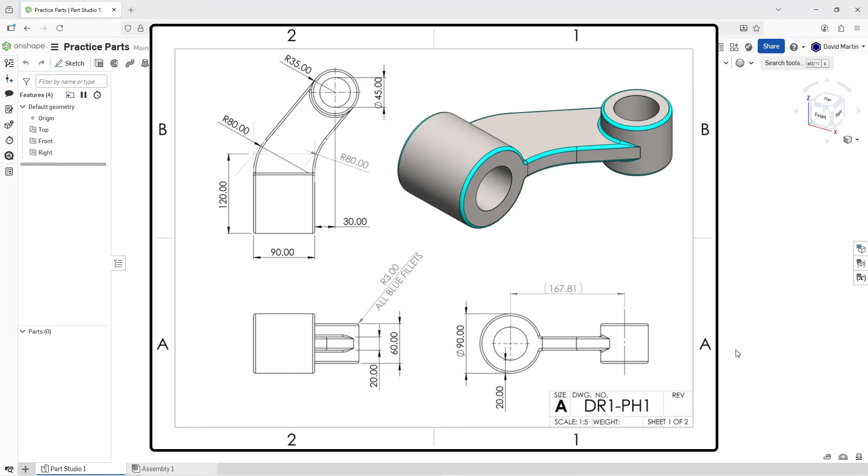In Onshape, I'm going to work on a part drawing that I found on Reddit. This is apparently for one of the SolidWorks exams or practice exams. And when you take a look at this drawing, it looks fairly straightforward. When you get into it though, it looks like, hey, maybe are there some dimensions missing? But there are some assumptions that you have to make when you are sketching and putting in the various different constraints. So let's go about doing this.

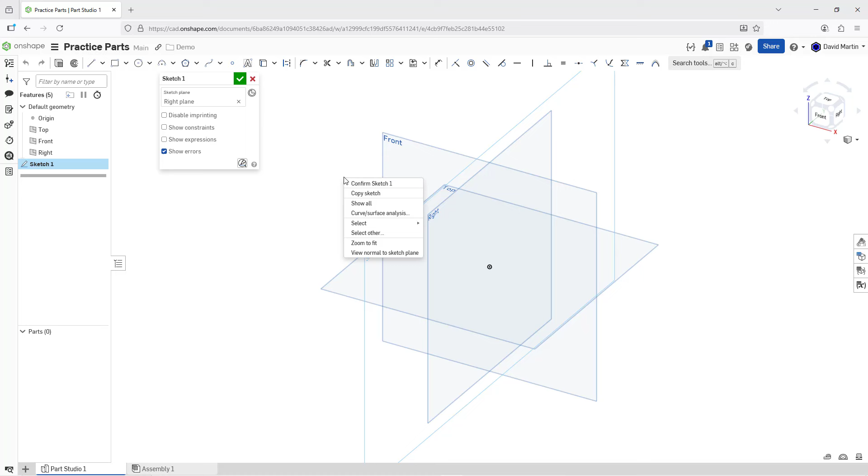I'm going to start with the big extruded cylinder down at the bottom. I'm going to select the plane called right. Then I will hold down the right mouse button to create a new sketch. And I will hold down the right mouse button again to view normal to the sketch plane. I find that to be easiest. Then let's sketch a couple of circles.

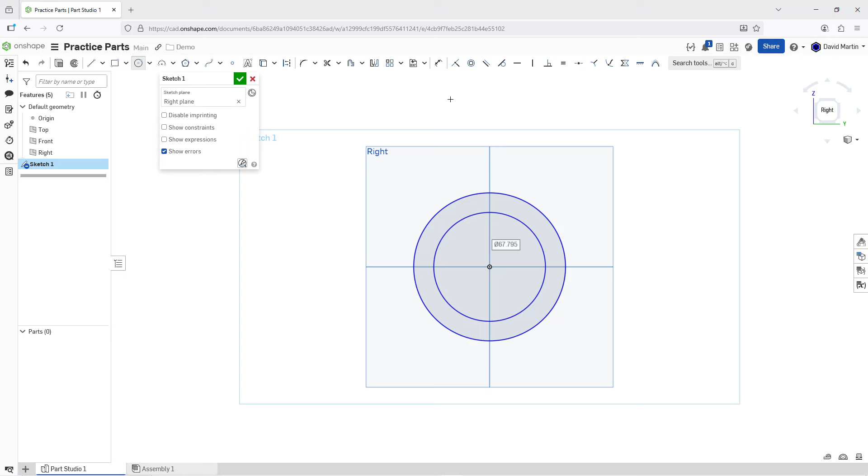So I'll lock right into the origin, and the outside is going to be a diameter of 90. So let me eyeball close to that. And then the next one is going to have a thickness of about 20. So let me drag it out about yay big. It is in blue. Let's throw in our dimensions. So let's click on the dimension icon. I will pick the big cylinder and then left click to locate it. Punch in a value of 90.

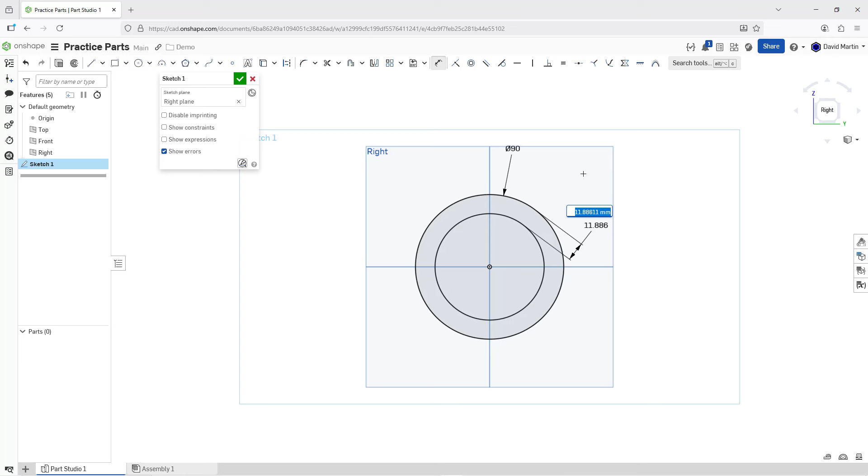And then for the thickness, I will pick the inner circle and the outer circle. And here we have that thickness dimension. And let's see, this is supposed to be a value of 20. There we go. And we can move that dimension over if we want to. This is all good. I will hit the green check mark to complete the sketch. Let me rotate the model slightly to look at it in a bit of an ISO view.

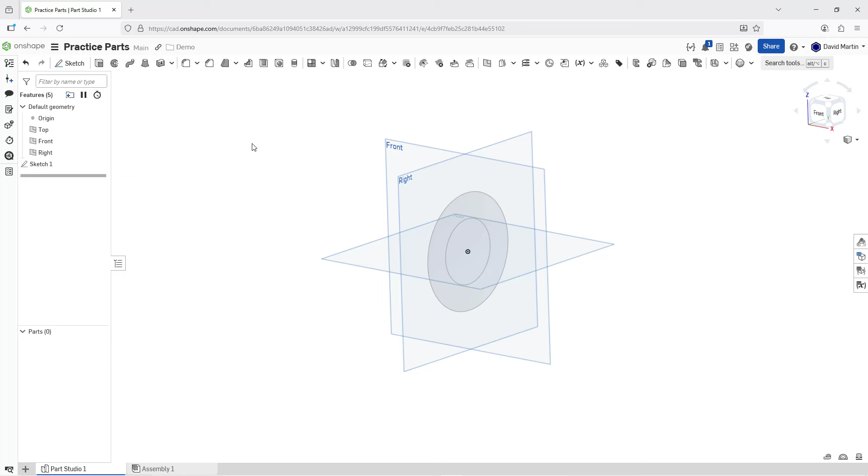Now let's extrude it. I will click on the extrude tool. Let's pick the face. I want this to be a symmetric depth, and the depth is going to be a value of 90. That is good for the first feature. I will click on the check mark.

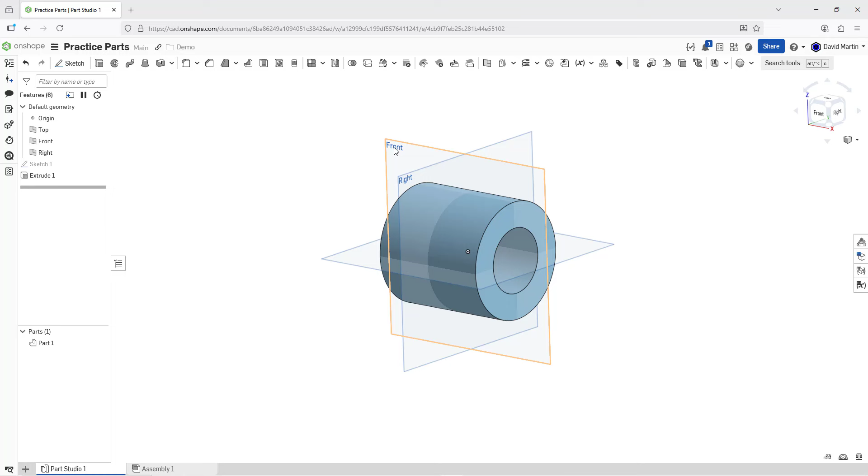Now we're going to create a sketch, and it's going to be for the rest of the part. We're going to be able to do the other extruded cylinder and also the web or flange in the middle together. You almost kind of have to do it that way, given the amount of dimensions that they give you. So let me start out by selecting the plane called front. I will right mouse click and hold and choose new sketch. And once again, I will view normal to my sketch plane.

And I'm going to start out with a construction rectangle that matches the same size as this cylinder. I come over from Creo Parametric. Normally I would just add some sketch references, but this will end up doing the same job. And I know I want this to be construction, so I will click on the construction icon. Then I will sketch my rectangle. I'm going to make it a little bigger than I need to in order to start out with. That way I can just snap into the right size by using the pierce constraint.

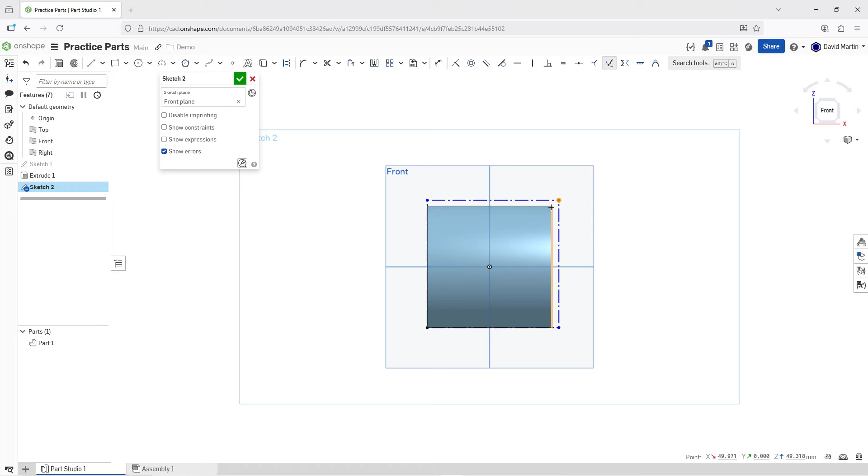That is this one, so I will click on it. And let's pick the vertex and then pick this line, and you can see it snap in there. And let's do the same thing here. And so now everything is black. We don't have any other different dimensions. So let's see. Also, for some of the stuff that I am going to need for extruding, well, I wanted to go through this thing entirely. So I need a face in the sketch that goes through here.

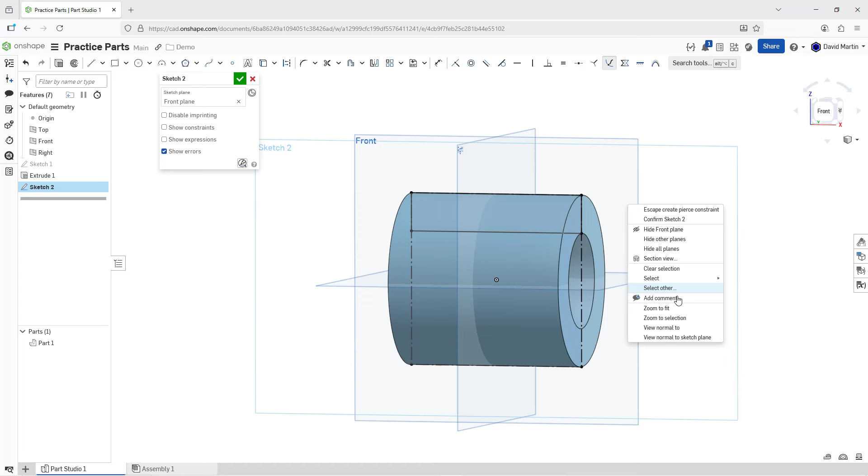So I'm going to create another rectangle. I will let it lock right into here, and let's let it lock into the width. I want it to be exactly the height of this one. So once again, I will use the pierce constraint. So I will click on it, and let's select this and select that, and it locks in. Everything is black. Everything is fully constrained. And in here we have a dimension. Well, it's not a reference dimension. It's a dimension of 120 on some construction lines. Let me go back to viewing normal to my sketch plane.

So I will create a construction rectangle, and I will start it here, and then I'll just exaggerate it a little bit to begin with. And now let's add in a coincident constraint. Let's make this coincident with this.

And we need that 120 dimension. So I will click on the dimension tool and let's dimension from here down to the bottom and change that to a value of 120. So there are our first different rectangles.

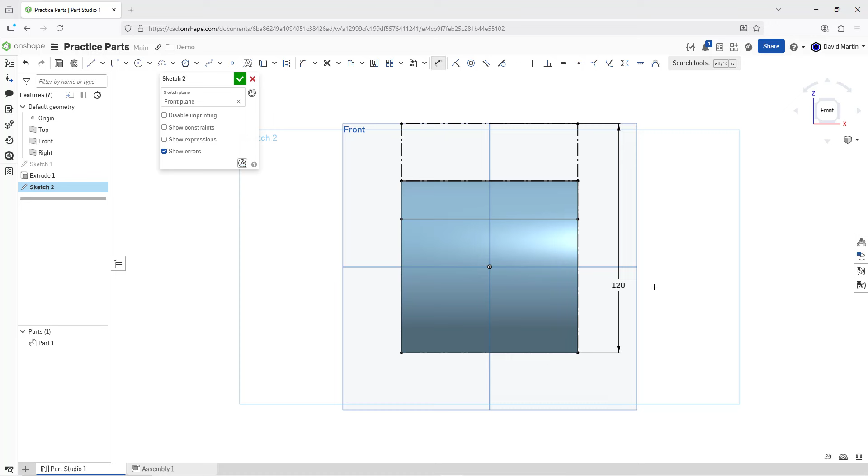And now I'm going to jump up and do the circles up at the top. And let's unclutter the screen. I'm going to use the keyboard shortcut P to turn off the plane display. That makes it a little easier to read. And so we need two circles located about up here in space. Let's do that. Let's create a center point circle.

And there's going to be a smaller circle of a diameter 45. So let me drag it out about yay big. And then let's lock right into the center and make our bigger one. In the drawing, they give a radius of 35. When we make the drawing here in Onshape, we could put in a radius dimension, but I'm going to have to use a diameter dimension when I am in sketch mode.

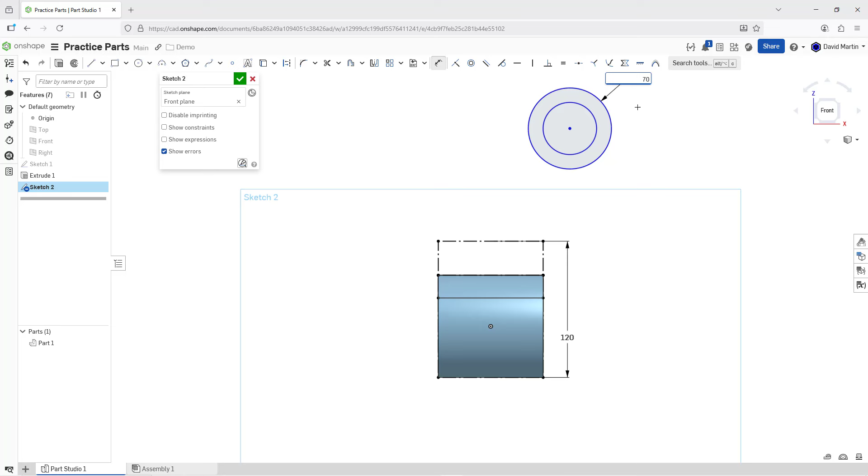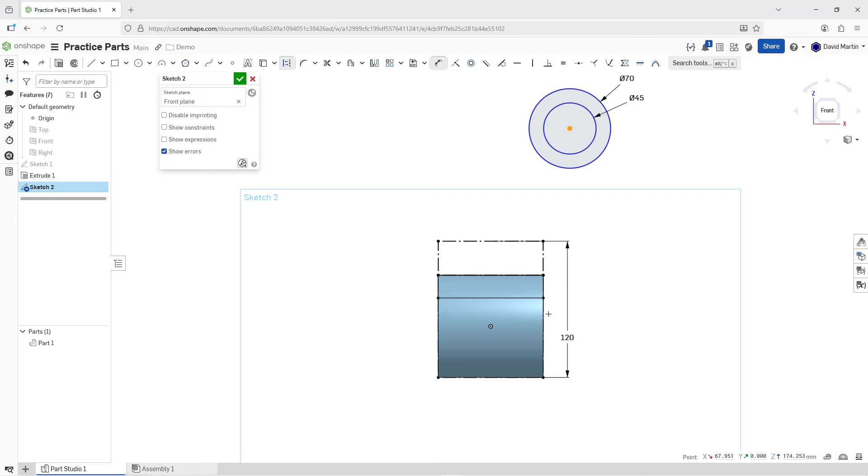So let's go to dimension and let's dimension this. And again, this is going to be a value of 70. And the other one is going to be 45. So that's good, but everything is in blue because we haven't fully located. There is one dimension 30 that offsets it from the side of the extrude. Let's throw that in. Let's put in from here to here and then get a horizontal dimension and throw in a value of 30.

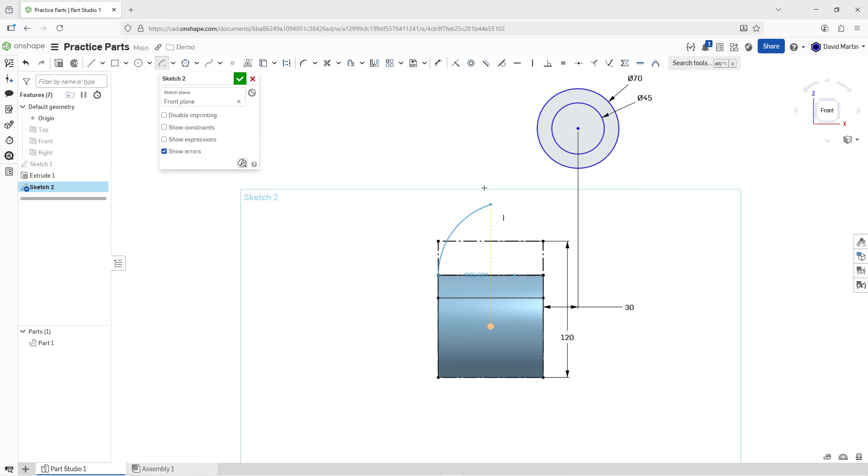Okay, for the next thing, let's do our two arcs with a radius of 80. One of them is going to start from over here, and the center of the arc is somewhere on this line. We don't know the exact location. So let me go to the arc and I'm going to do a center point arc. Let's have the center point on, wait, it's going to be on this entity. I almost put it in the wrong place. On here, and it's going to start right at that location and make it out about yay big.

And then we're going to have another one, and I'm letting it give me that dashed line indicating that it is in line with that horizontal line. Let's locate it there and have it start right there and go in, about so big. Now I'm going to throw in those radius dimensions. So let's dimension this and radius out here and punch in our value of 80. And then let's grab this one and put in a radius of 80 for it as well.

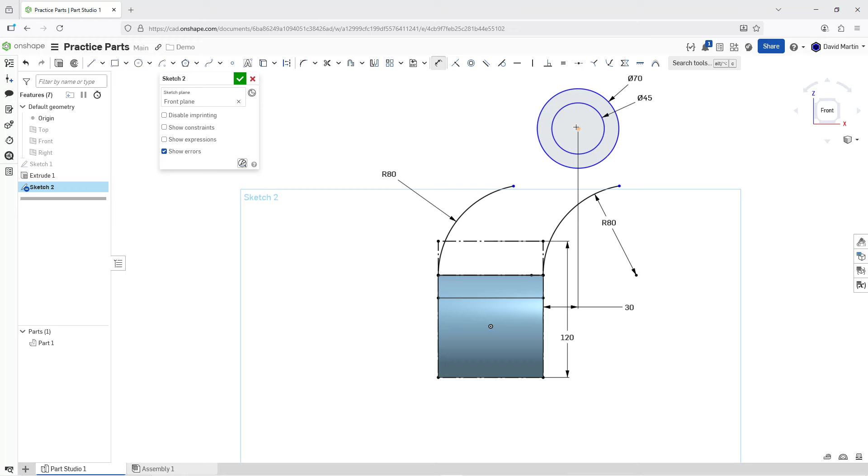And then for connecting in some tangents, I'm going to put in a construction line that ends up going through the center of the circle. Let me get out of dimension mode. Let's go to construction mode and sketch in a line. I'm going to exaggerate it a little bit, just have it go through those two different areas. I'll use the escape key on the keyboard to get out of there. And let's go into coincident and make these coincident.

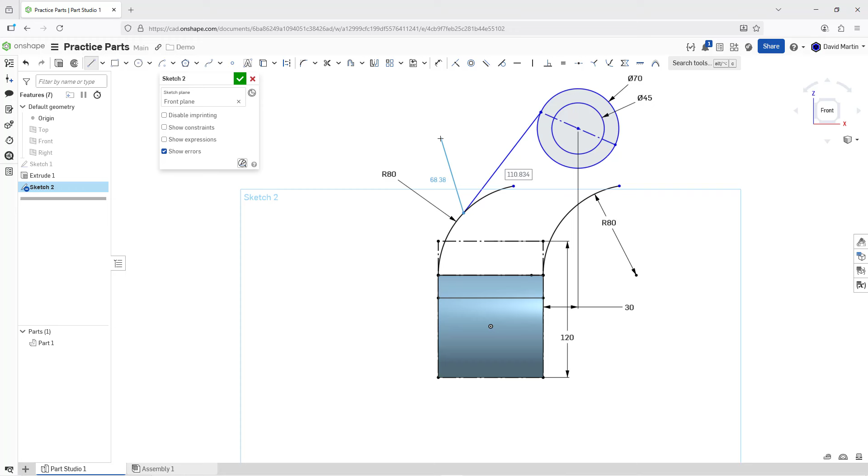And so this will help me when I'm sketching in a couple of regular lines to go from here and then into here. Let me just do it connected. Let me hit escape, go back to the line and do the same thing over on the other side. Let me hit the escape key. So now we get it filled in. Let me zoom in a little bit. But everything is still gray at this point, so we need to add in some more constraints.

For example, these lines should be perpendicular to this one. So let's see if that helps us out. Perpendicular here. And this is way too skewed over. Let me throw in a tangent. We want this and this to be tangent. There we go. That's starting to look better. Let's go back to perpendicular here and here. Oh, everything is looking good.

Everything went black. And so I thought I was going to have to throw in another parallel, but when I was sketching, I ended up getting some of the right assumptions of the constraints. If you're not sure, you might have to turn on constraints, but holy cow, this is a mess.

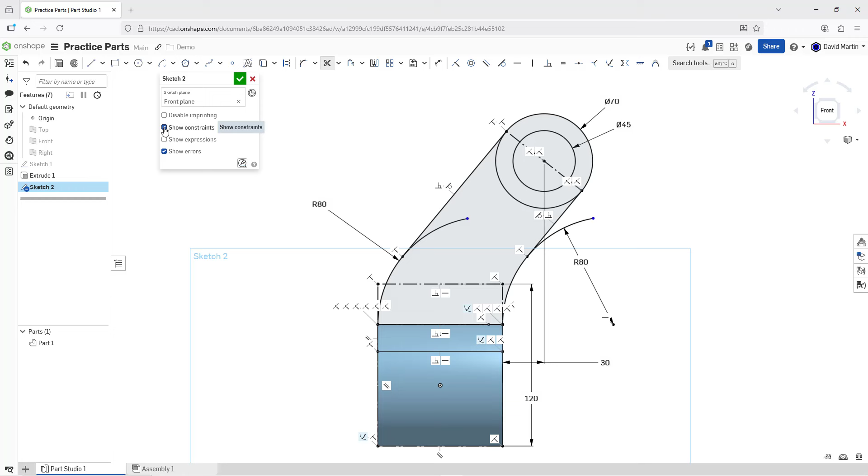And so this is one of the reasons why I don't like examples like this, where you end up having to get the right combination of constraints or throwing in constraints later on. I don't know if that really tests someone's modeling ability. I'd rather they don't give you something where you have to see the trick. But anyhow, let me use the trim tool.

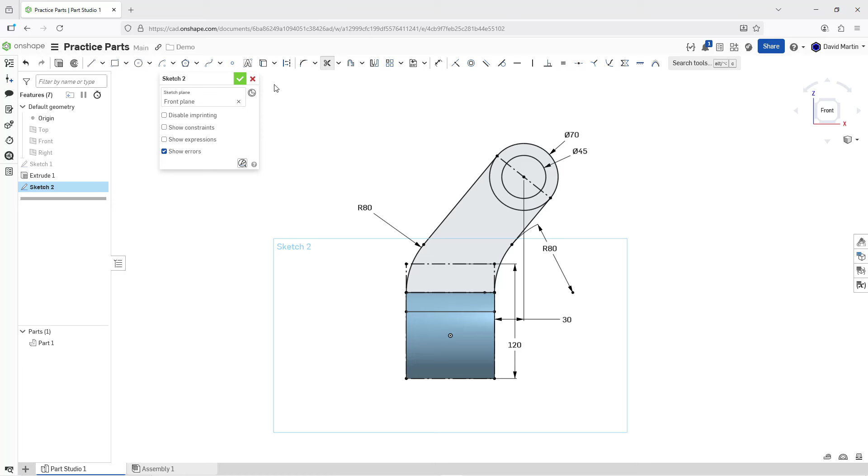I don't have to trim these different segments, but I am going to anyways. Just make sure I don't have a segment over there. But everything looks good in my sketch. Let's hit the check mark in order to complete out of here. And so now let's make the extruded cylinder. I will click on the extrude tool and then click here.

And let's see, this is going to be a symmetric depth, and it's going to be a value of 60. So that's good. And you'll notice that this is coming up in a different color because it is not connected. It's going to end up giving us a second part. It is creating a new part. That's okay. Everything is going to connect together in a moment.

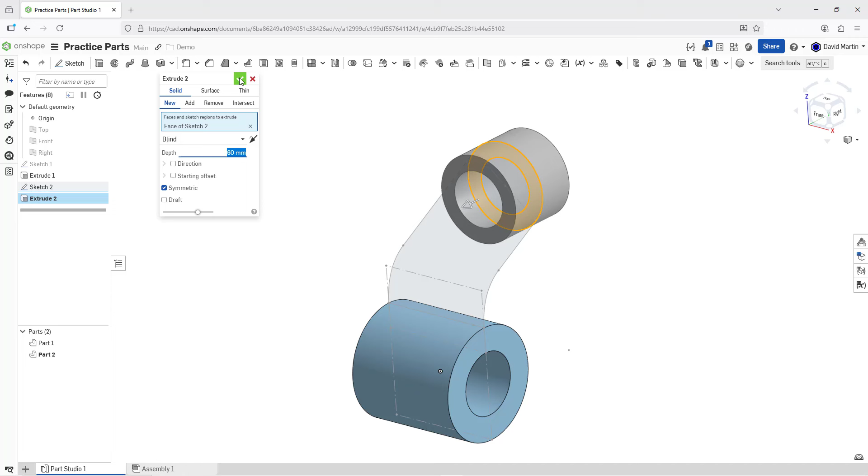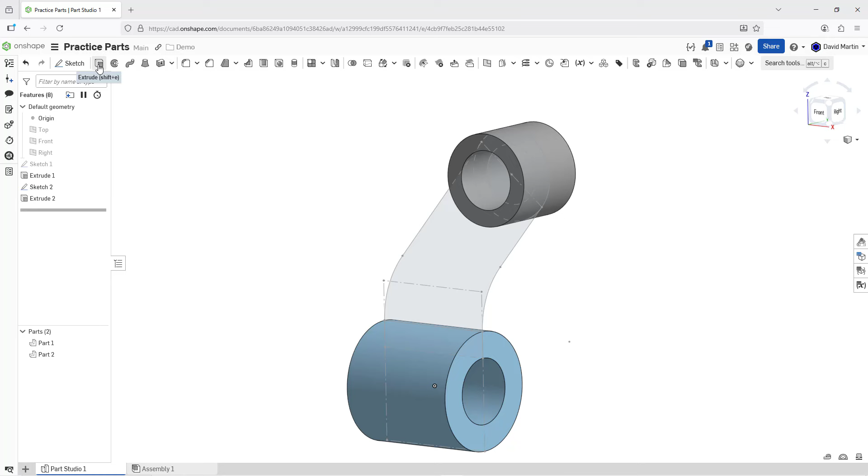So let's hit the check mark there, and the sketch went away, and I need the sketch to come back so I can make my flange, or that web in the middle. So I will click on the extrude tool, and let me pick this as what I want to extrude. Let's change this to symmetric and a value of 20.

And right now it's giving us a new solid. This would end up creating a third part, but I don't want it to create another part. Let's go add it, and let's just do merge with all for the scope. And right now it's just merging it to this thing over here, but I really want to throw in another face to merge with. So let me move my mouse over here.

Let's right click, select other. And let's go with this face as well. And that way it'll end up just having a single part. Everything is going to be together. So this looks good. I will hit the check mark.

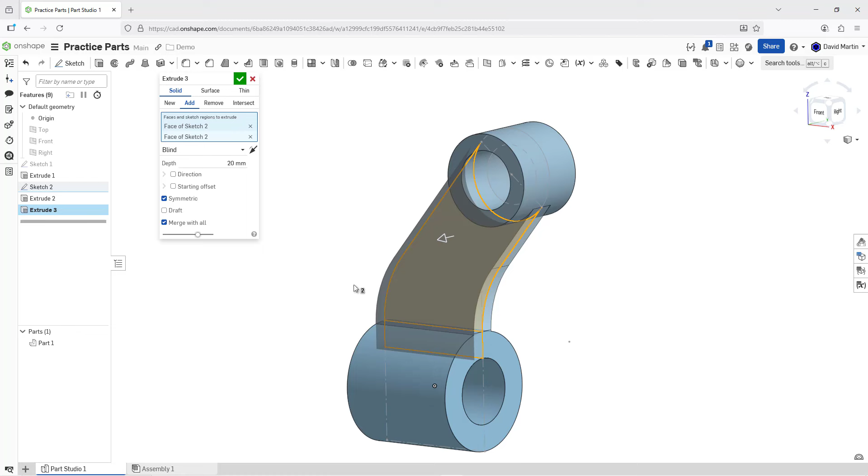And by the way, if you didn't choose that other face, you could have selected the bottom part of the web and extruded it to this surface. You could have done it in 2 extrudes if you wanted to. But anyhow, let's hit the check mark in order to complete that. I no longer need the sketch visible.

And so I need some fillets at this point. I'm going to have to create a few different fillet features. There is a fillet that goes all around here, but in order for it to propagate, we need some tangency. So let's throw in our first fillet. Let's go to the fillet command and pick this edge, and it's giving us a radius of 3. That's good. That is what we want.

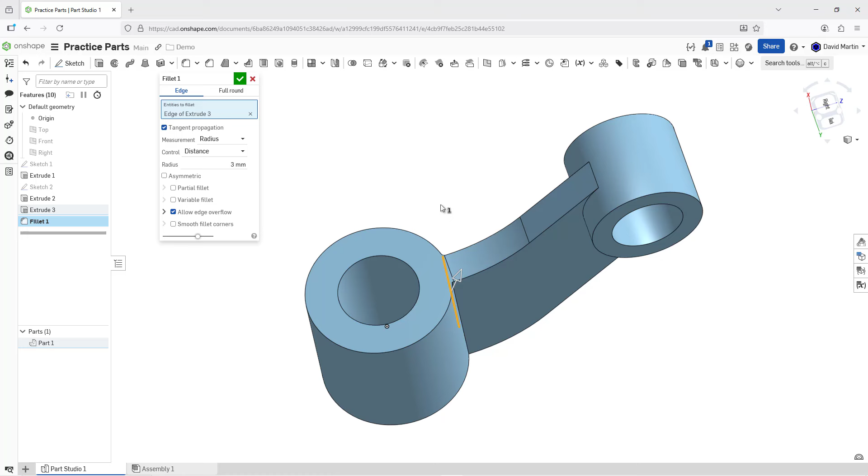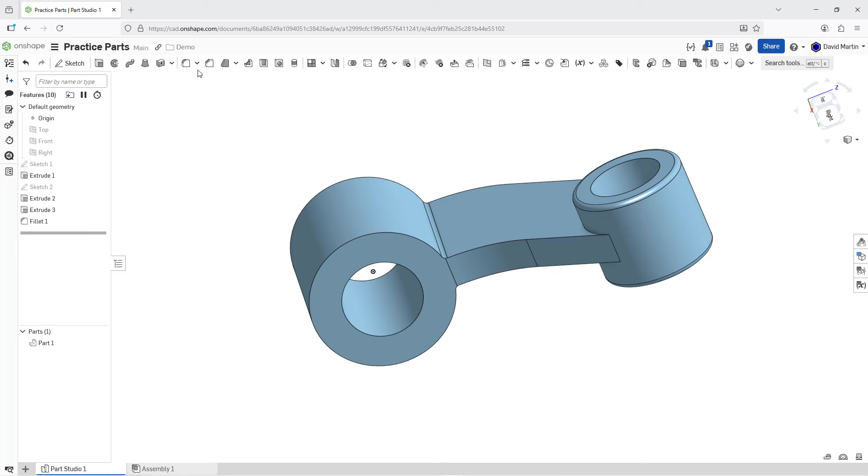It is a standard of 3 everywhere, and we've got to do the same thing at the bottom. And while I'm at it, I might as well start throwing in the fillets for this edge and this edge as well. So that's good for my first fillet. Now that I have those fillets here, I can create another fillet. Let's pick this edge and this edge, and you'll notice that it is propagating to tangent. Let's hit the check mark.

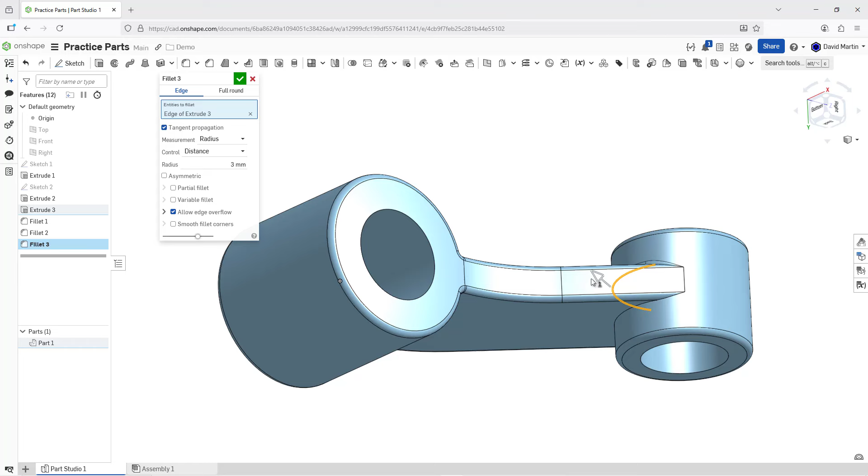And for the last fillet, let me pick this edge here and this edge here. And so let's hit the check mark. I think that does it. I think that ends up creating the part from the drawing.

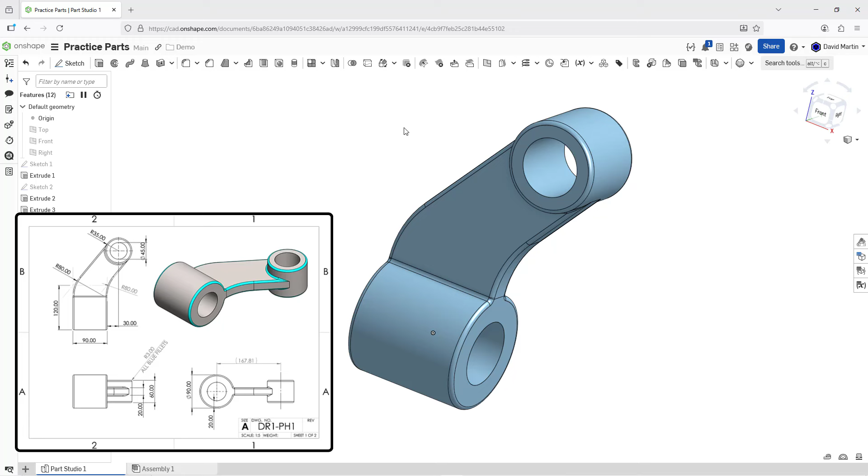Again, it looks a little different than the one that was created in the drawing. I don't know if the one in the picture is from the student or if that was the drawing that was given to the student in order to replicate in SolidWorks. But anyhow, there's some good practice for you.